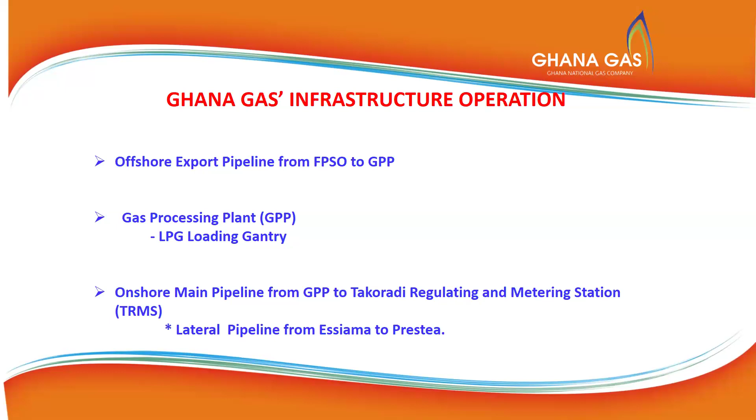Okay, so I want us to take Ghana Gas through a journey of the various different places where we have been, the accomplishments we have gone through, and then I'll break them down as we go through. Albert and I will take this presentation in turns. I'll do some bits of the slides, and he will take over when he gets his opportunity as well to go through.

So we started construction of the gas processing plant in Atuabo, where you are now, in May 2012. So construction of the network of pipelines was started. I'll talk more about the design of the pipelines a bit later. And then by November 2014, we had our first gas. The process plant was built, the network of pipelines offshore and onshore were in place, and the first gas from the FPSO had come into the gas processing plant for its conditioning and separation accordingly.

In 2015, one high note is the commercialization of the gas processing plant. So the plant is designed for 150 million standard cubic feet of gas. I'll go into more details later. We have a 12-inch offshore pipeline of around 58 kilometers, and a 110-kilometer onshore pipeline to transport the gas from Atuabo gas processing plant through to Aboadze, right through to Tema, and it tees off also at Prestea for power generation and various aspects.

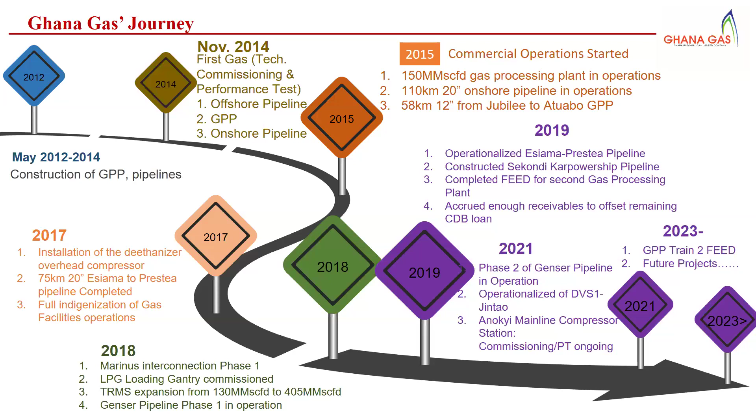By 2021, we had established various networks where we are supplying gas to third parties who are either ceramic operators or small companies taking some of our gas, which also generates Ghana Gas some revenue. And by 2023, we are still looking into getting our train 2 established, with various future plans ongoing.

Okay, so I said something right from the beginning. Ghana Gas is split up into an offshore facility, which is our offshore pipelines. We then have a gas processing plant, and then we have the onshore pipelines transferring the gas throughout. We have 3 FPSOs, and if it was a Q&A, I would have asked, what is the 3rd FPSO? But these 2 FPSOs, the Kwame Nkrumah and the Atta Mills, which are in the Jubilee and TEN fields, are the FPSOs that bring raw gas.

Yesterday, Dr. Riverson touched on the raw gas that comes into our plant. So when you drill oil, you have various types of wells. We have gas wells, and we have associated wells. Associated wells, as we touched on yesterday, contain both oil and gas. So once the oil is separated from the gas bit, which is virtually carbon chain 1 to carbon chain 6, a network of pipelines brings it to the gas processing plant for processing as raw gas, also called wet gas, as we explained yesterday.

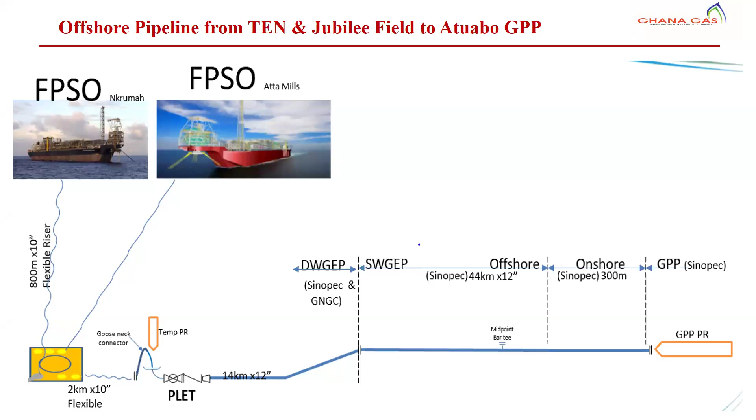Okay, so you are at the gas processing plant. You have separated the associated gas from the crude oil. Your associated gas contains ethane, methane, propane, butane, pentane, and hexane. So you have this whole set. It also contains water and various impurities. And what the gas processing plant is trying to do is separate these components from each other, removing your water and any impurities.

Yesterday Dr. Riverson talked about the fact that our gas is a sweet gas. So we are not removing much hydrogen sulfide and carbon dioxide from it, and hence the plant is not designed to do those separations. But in various countries with sour gas, you would have such materials that you have to remove. So it's one good thing about the particular type of raw gas or wet gas that we get from the various FPSOs.

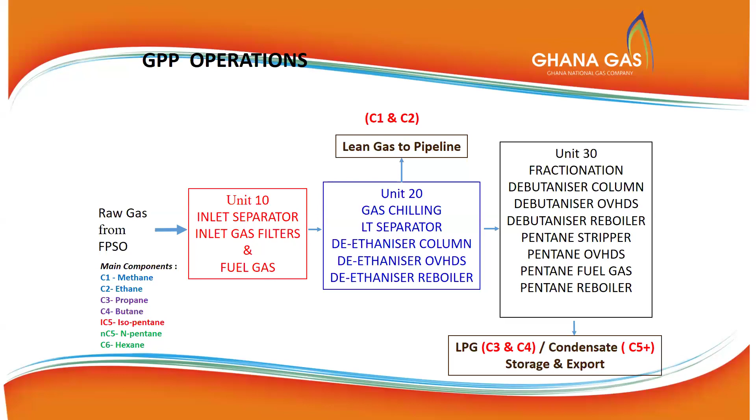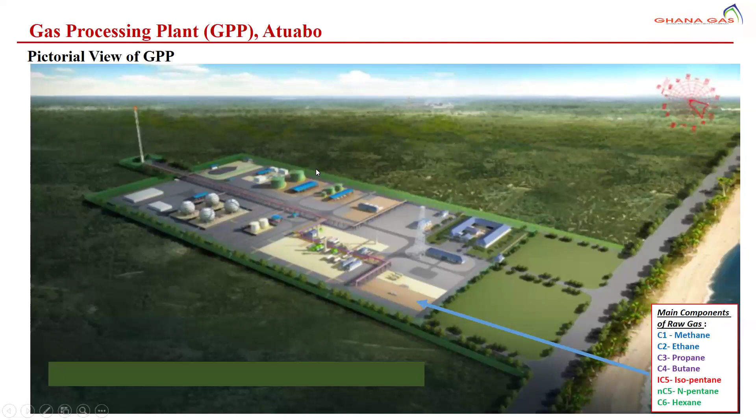And then you go through the filters, then you come into your chilling process, going through your cryogenic. I said this plant is a JT valve, a Joule-Thomson valve, using the Joule-Thomson principle of choking the gas. The gas is around 110 bar pressure at that point. You choke the gas using just a Joule-Thomson valve to a pressure around 50 to 51 bar gauge.

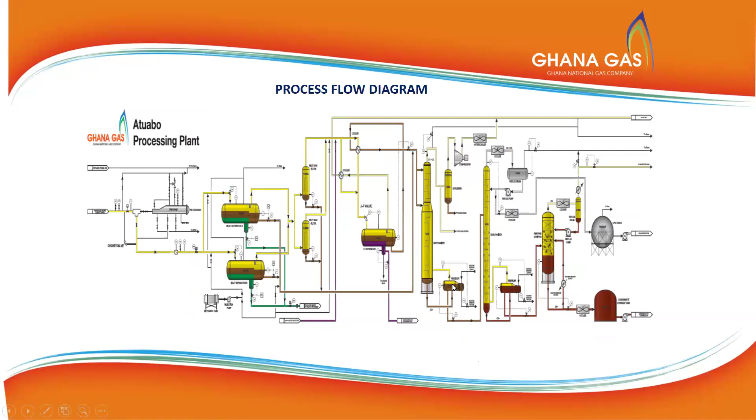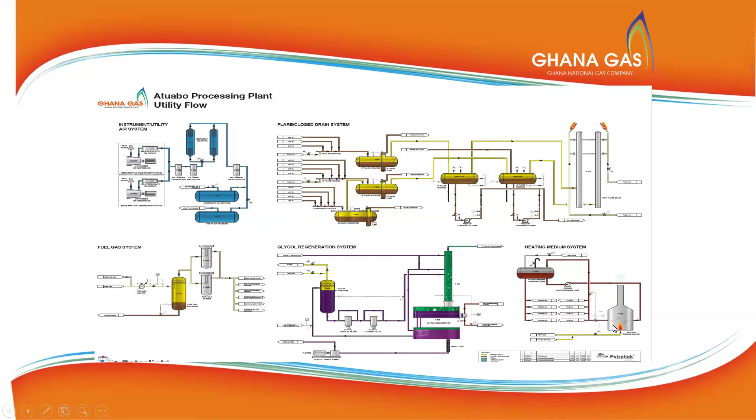And then, of course, your heat medium system. All your towers I've shown here, these are reboilers. They need heat, and this heat medium system serves as a closed system, a hot oil system, compared to other plants which will use steam.

Albert, when I'm getting closer to my slide, I need to stop. Please let me know.

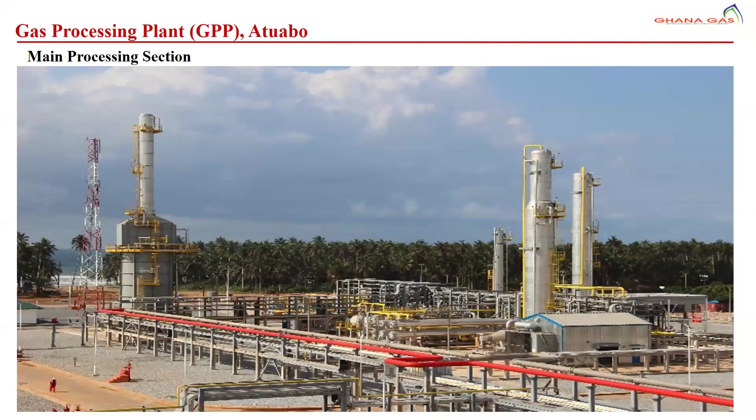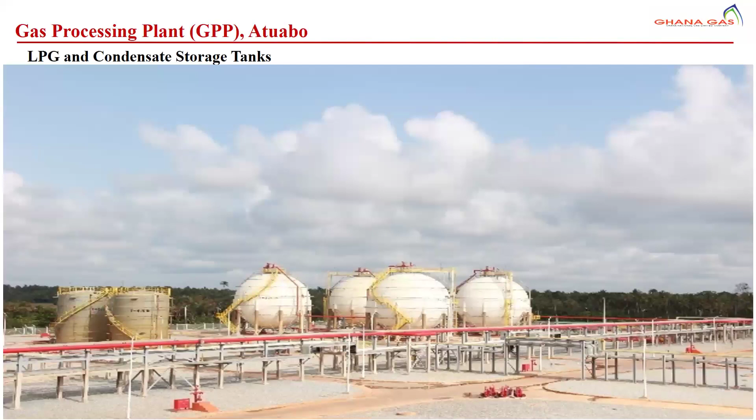And for LPG and condensate, after you've processed your gas, your lean gas is continuous. It joins your onshore pipeline and moves out. Then your LPG and condensate are stored in these vessels. As I was saying before, we have 4 LPG vessels, 2,000 cubic meters capacity stored. We also have extra capacity with Quantum Terminal, which is a third-party company that sells LPG to the market.

Ghana Gas, although we produce LPG, does not sell LPG directly to the Ghanaian market. As you all know, it goes through various processes, various companies, various BDCs, and hence by law, we don't sell that. So a company like Quantum Terminal, which is by law designed to do that, does that once we sell it to them. Okay, so I think I'm done with my slides. This is my last slide for you.

The final bit, I've talked about Ghana Gas being split into 3 sections. I wish it was interactive, but it's offshore, which is our pipelines, which are connected to our processing plant and also connected to the 2 FPSOs on the Jubilee and TEN fields. That's the Kwame Nkrumah FPSO, and then the Atta Mills FPSO.

The 3rd FPSO is actually connected to our onshore pipeline. So that one does not bring raw gas for us to process. It actually brings lean gas, and it connects to our onshore pipeline. And then Ghana Gas serves as a transportation pipeline for it to be able to transport its lean gas. That's ENI, that's the FPSO Kufuor.

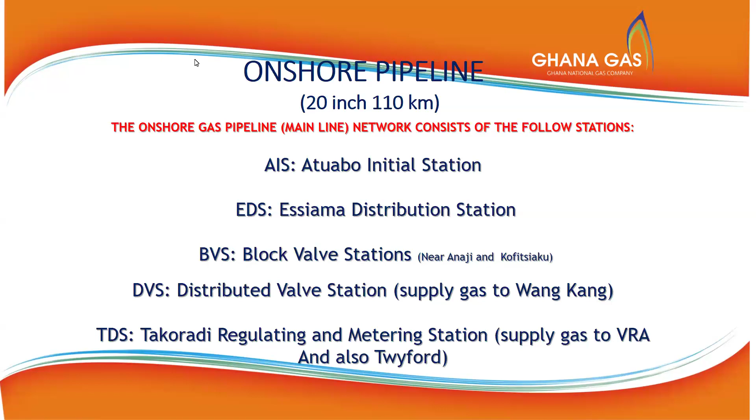Albert, I think it's your turn now. James, I think it's Albert's next slide. So Albert, I don't know if you want me to come off so that you can take over and control it. No, Michael, since you are going to be on and you have the material ready, once I get to the bottom, I will give you a thumbs up to move on to the next slides, rather than fiddling with it so that we don't end up losing it. Is that okay? That is fine. As long as I don't have any internet breakages on my side, I'm willing to do that. If I do, then please take over. I shall do that then. Thanks a lot. Can we move on to the next slide, please? Thank you very much, Michael.

As Michael said earlier, tomorrow we shall delve a bit more into the nature of the molecules that we get all the way from the FPSO into our plant before it is processed, then after it leaves the plant to our various clients. We cannot do that without analyzing what is coming in, and the lab is the department that deals with it. Every molecule of gas that comes in here is frequently analyzed by the lab team, and the lab team becomes the eyes for the process engineers in the plant, as well as those in the central control room.

So periodically, the lab team has to take a sample of the raw gas that is coming in, analyze it, and share it with the control room engineers. Depending on the DNA of the gas that comes in, process parameters might be changed or might be kept as they are. And fortunately for us, we don't synthesize anything here. Whatever gas comes into the plant, that is what we have to work with. We don't have any catalyst in-house to join molecules to molecules.

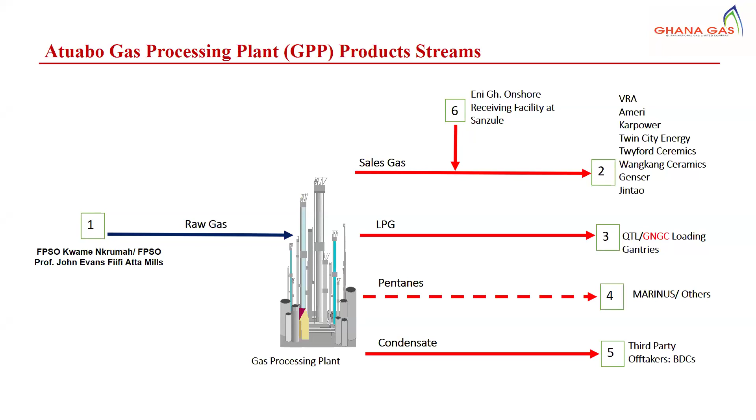And then we move on to the pentanes, which will be the C5s, different isomers there. So the bulk of the condensate will then be the C6+, which will be the hexanes and the heptanes and the octanes and the different isomers that will be present in there. Michael, can we move on to the next slide, please?

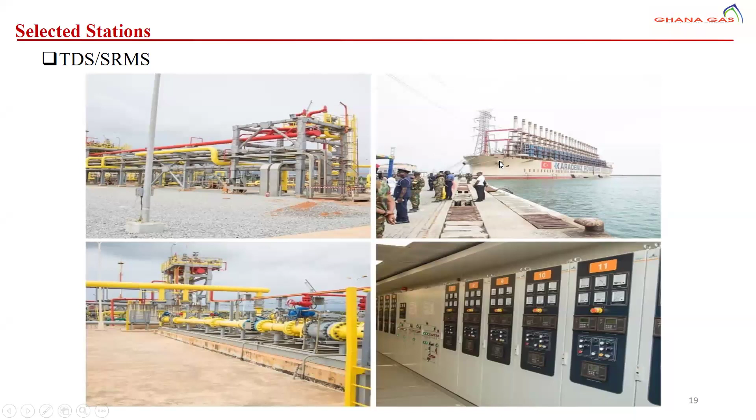Next slide, please. So these are some of the pictures of our stations. TDS means Takoradi distribution station, SRMS Sekondi regulating and metering stations. When the lean gas goes there, they have to meter it, they have to regulate the temperatures and the pressures before they can send it off to our various off-takers. Different off-takers have got different temperature and pressure regimes. So knowing which off-takers and their pressure regimes, it will be regulated that way and sent to them. Over there is a Karpowership where we also send gas for electricity generation, and at the bottom is one of our control rooms as well. So can we move on to the next slide, please?

Now, as was reiterated earlier, we get gas from upstream from the FPSOs, which are the Kwame Nkrumah and the Atta Mills. We can get it from both or from one, depending on the nomination. The gas will come in upstream. We will process the gas, and then we will send the gas that meets specifications to our off-takers.

The plant, as Michael said, I'm not going to belabor the point, is made up of three main components: the main gas plant where the gas is processed, and our utilities, which is where the power generation comes in. Also the glycol that is used to remove water molecules from the raw gas, and the glycol is later regenerated, as well as the flare system, our utility air system and nitrogen generation skid, as well as our heaters, all fall under the utility side.

And the lab team takes samples regularly, analyzes them, and shares the information with the process control room engineers, and they make the parameter tweaks when the need arises, so that it ensures that we get products that are within specifications for our off-takers, as well as for the Ghana market, if it is LPG or if it is condensate.

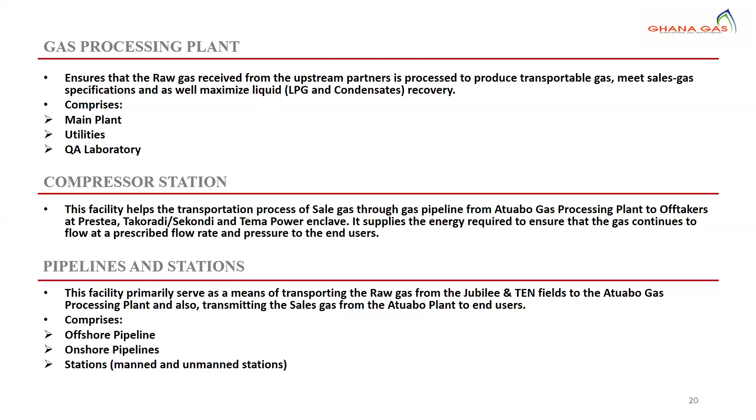And then we have our stations as well. Some of them are manned and others are not manned. The manned ones normally end up being the distribution stations and the regulatory metering stations, but unmanned ones end up being the block valve stations. But fortunately for us, we do have a fiber that is stretched along the pipelines. So we are able to determine if there are any changes, if there's a pressure... pipeline, the fibers, any issues that are going on at the unmanned ones.

So Michael, can you move on to the next slide, please?

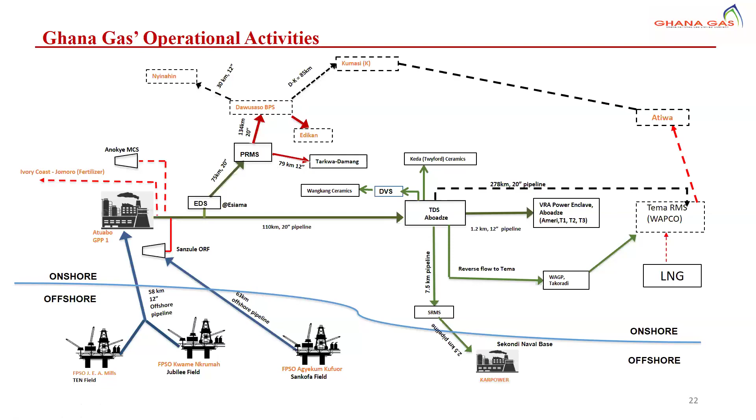So now, this is what I just basically explained. Currently, the solid lines are the existing projects from Atuabo to Aboadze, that is the onshore pipeline. The WAGP, that is the West Africa Gas Pipeline, is a pipeline which is not owned by Ghana Gas, but owned by the West Africa Gas Partners. It sends gas from the Eastern Enclave, all the way from Nigeria, from Tema. Before Ghana Gas came on, that was what it was doing. It was sending gas from the Eastern Enclave to Aboadze.

At Aboadze, a lot of the time they were using crude oil, be it light crude oil or heavy crude oil. But when Ghana Gas came on, since gas is cleaner than crude oil, Ghana Gas cut the cost down immensely. At that time, if they were spending, let's say, $2 million every single day to produce electricity, the coming on of Ghana Gas cut the cost down to less than half to produce the same megawatts of electricity. So Ghana Gas coming on became key.

So later on, the West African Gas Pipeline was converted to become a reverse gas pipeline. So where there is a glut of gas in the Western Enclave, that is gas from Ghana Gas and gas from ENI, some of the gas would then be sent to the Eastern Enclave, that is Tema, for them to be able to process gas with.

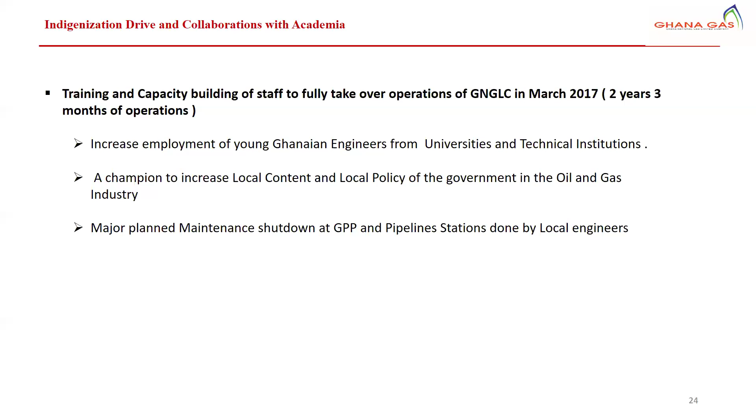When it comes down to major maintenance shutdown activities, it is all done by Ghanaians, unless there is something that cannot be done, that requires maybe warranty purposes depending on the equipment, that calls for an engineer to come from outside Ghana. But even when the engineers come from outside Ghana, our maintenance team and our engineers are involved with them in the shutdown activities that happen in our plant and also in our various stations. Next, please.